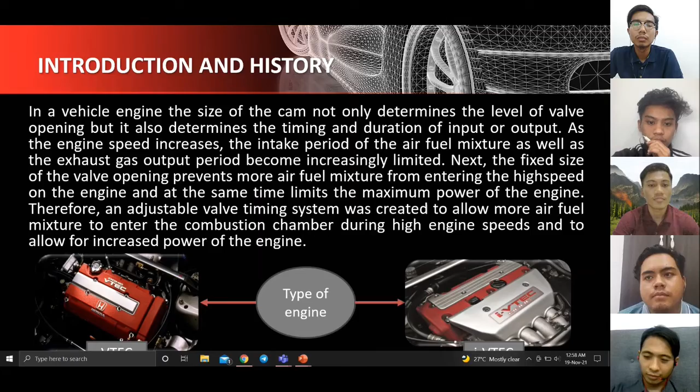Thank you. Now I will explain the theory of operation on how it can improve engine operation in a car. Honda continued to improve the original VTEC system, which has now evolved to Honda I-VTEC. This technology first became available in 2001, and mostly 4-cylinder car models use I-VTEC technology.

I-VTEC stands for Intelligent variable Timing and Lift Electronically Control. It is a system that combines VTEC and VTC, which produces an incredibly efficient and powerful engine.

The VTEC part of the system has two different camshaft profiles, one for low RPM and one for high RPM. The resulting effect is much greater efficiency and slightly better performance.

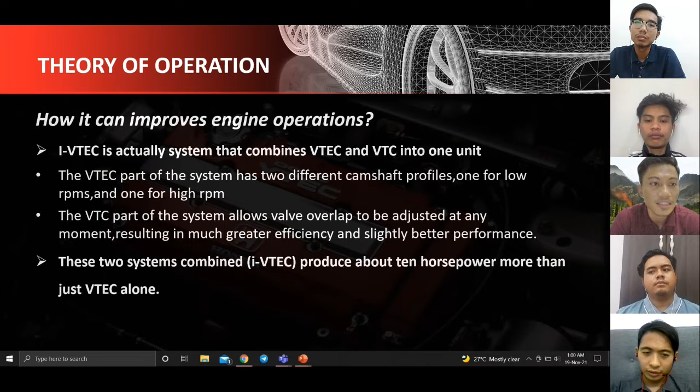The VTC part of the system allows the valve overlap to be adjusted at any moment. These two systems combined in I-VTEC produce about 10 horsepower more than just VTEC alone. So thank you, now we go to the next part.

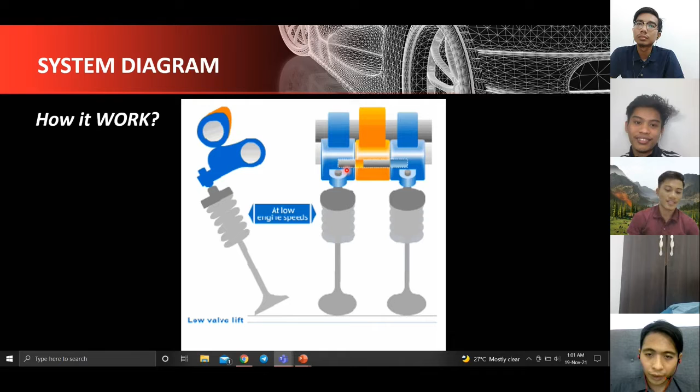As you can see, how does VTEC work? At low speed, the synchronizing pin is not engaged with the second cam profile. Then at high speed, the pin is engaged with the second profile. You can see when this pin is engaged at high RPM, the valve lifting is higher compared to low engine RPM. So this one is low, this one is high RPM.

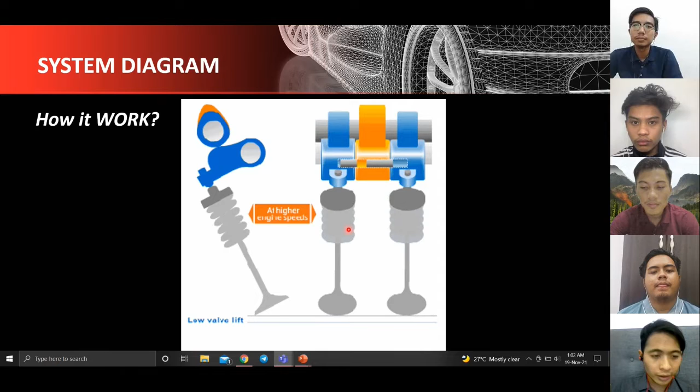For I-VTEC, the technology improves the valve overlap. What is valve overlap? Valve overlap is the period during engine operation when both intake and exhaust valves are open at the same time. The special feature is that it can control the overlap of the valve by adjusting it at any moment using software. So we go into the next slide.

Okay, so I will tell you about advantages and disadvantages of the system. The advantages of I-Vtec: first, better fuel system. VTEC stands for Intelligent Variable Valve Timing and Lift Electronic Control, a system created by Honda to improve fuel consumption of Honda vehicles. The VTEC system uses two camshaft profiles and hydraulically selects between the two.

Second, the advantage of I-Vtec is high initial torque with relevant power. With high initial torque, the engine doesn't need to work as hard to obtain high torque and better fuel consumption. Third, lower emission. I-Vtec is one that does not produce much pollution.

If you put in a good low speed camshaft, the engine's performance at high speed is not good. Now, what the I-Vtec technology does is that Honda engines work effectively by having multiple camshafts. This is the reason why Honda I-Vtec models have high performance and lower fuel consumption.

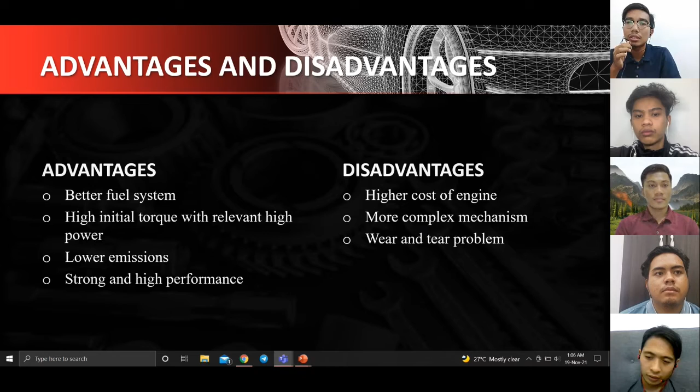And lastly, wear and tear problem. With newer technology and newer components, there are more chances that parts and components in the engine lose and decay.

Okay, what can we improve this technology on in the future? For the first thing, our opinion on the technology for the near future is to keep the I-Vtec engine as naturally aspirated, or NA for short, without any add-on forced induction such as turbo or supercharger. Because when we add on a forced induction, the engine no longer has a long life and can't withstand a longer life.

The second reason we want to keep it as NA is because if we add on a forced induction, there will be high maintenance required for the forced induction to be maintained. For the third point, if we add on the forced induction, the engine internals will be exposed to higher pressure and temperatures that will affect the longevity of the engine.

So for our improvement of this engine, what we decide is the improvement that should be done is to add on a third cam profile while keeping the I-Vtec as NA. Why do we want to add on a third cam profile? As you can see, a normal I-Vtec engine has two cam profiles that work on low RPM and high RPM.

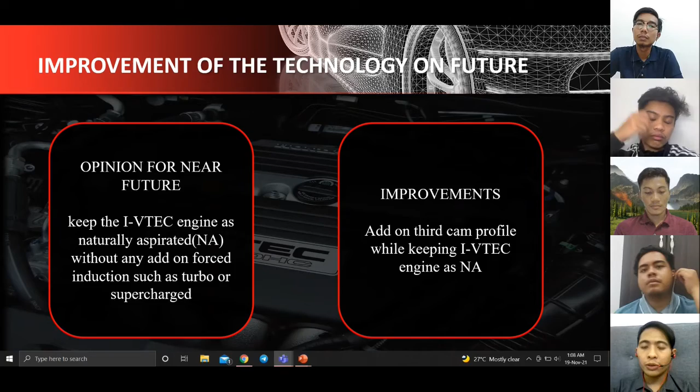Okay, that's all from us about I-Vtec. I hope you all can understand what we just explained to you about I-Vtec. That's all from us. Thank you very much.